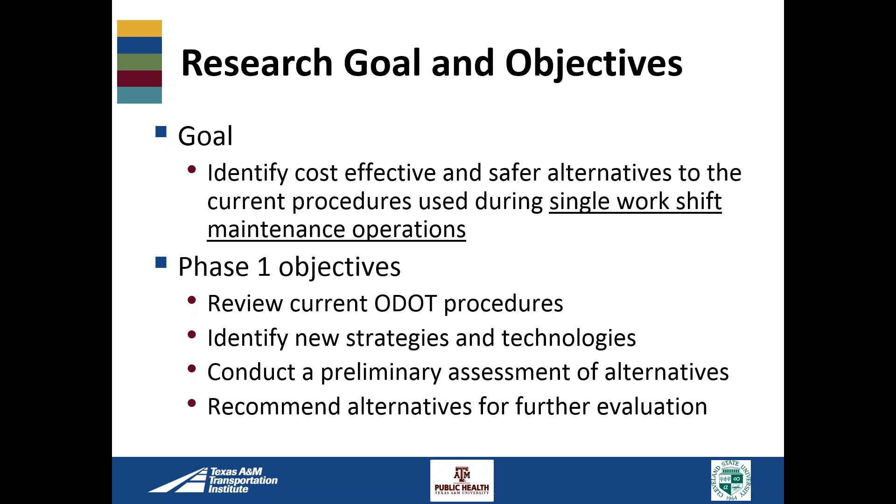It was broken into two phases. In phase one, we reviewed the current ODOT procedures, identified potential new strategies and technologies, conducted a preliminary assessment of these alternatives, and recommended some alternatives for further evaluation in phase two. In phase two, we actually purchased and evaluated those recommended alternatives, and also organized and conducted a demonstration of full matrix truck-mounted changeable message signs.

This was one of the alternatives we mentioned, and the maintenance crews in Franklin County were interested in looking at those devices, but not in us testing them directly. So we hosted a demonstration that brought together a bunch of vendors so that different ODOT employees and staff could look at those technologies and talk to the vendors directly, kind of a show-and-tell environment. I won't say much more about that today, but wanted to let you know that's something we conducted, documented a bit in the final report. At the end of the project, we recommended some of those alternatives for implementation, and we'll get to that at the end of the presentation today.

I want to quickly go over phase one to give you some background information. I won't go into as many particulars as are in the research report because we want to get to the phase two findings, but I at least want to give you some background so you know where we were coming from. In phase one, we basically followed and reviewed 15 different maintenance activities.

These were mainly in the Franklin County, Columbus area, involving mobile and stationary operations, some day, some nighttime. The majority were on high-speed freeways, again in the Columbus area, and the majority were single-lane closures, though we did have some two-lane closures. When I say high speed, I'm referencing roadways that were 55, 60, or 65 miles an hour.

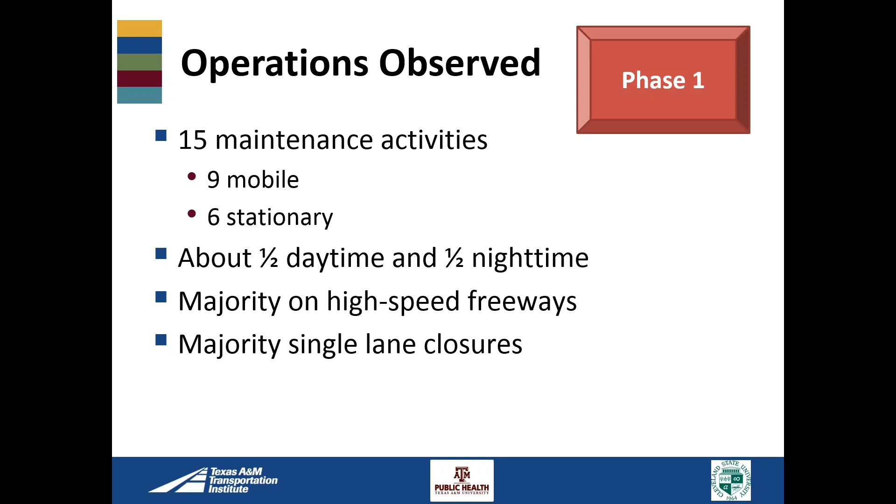Based on these observations, we identified different procedural and equipment safety enhancements that we thought might be applied by the Ohio Department of Transportation. I want to first walk you through some of the procedural safety enhancements. These don't necessarily call for adding any kind of equipment, but they just need to be recognized and applied in the field, most likely in new employee training or periodic refresher training.

The first safety improvement is just to pull over periodically to allow traffic to pass. This can be when a convoy is going to a work site or once they're at a work site. We did see a couple of instances where queues built up and we had impatient drivers, and we want to be aware that as impatience grows, motorists take more risky behaviors, which can lead to safety issues with the motorists, and that can impact the safety of our work convoys as well.

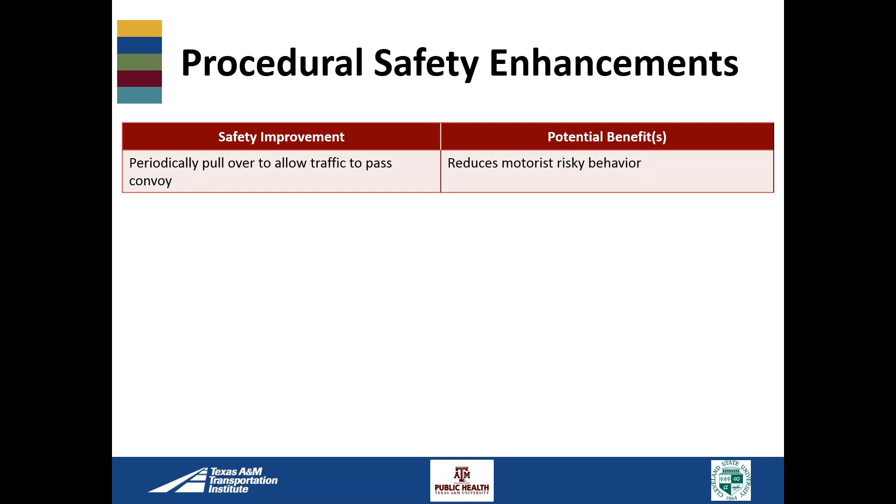If you have the ability, I know in some places there isn't always space to pull over, but if it is there and you notice a queue forming, we suggest that you periodically pull over and let that queue dissipate so that you reduce that impatience and the propensity to take higher risks to pass the convoy. We also noticed on a couple of different occasions that work vehicles were actually parked in merging tapers.

Merging tapers are where the motoring public transfers from a closed lane to an open lane, and you do not want any kind of equipment or work going on in that area. Equipment such as your shadow vehicle can sometimes be located in part of your buffer area, but really your work area, activity area needs to be downstream. So you need to be aware that if there's work to be done where the merging taper is, you need to back that up so that you have your merging taper out of your work area.

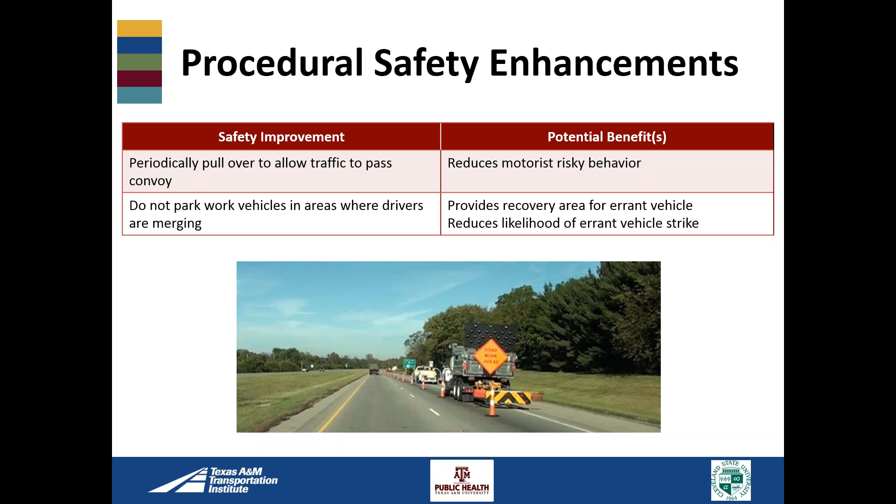This is just a picture showing one crew that was working there in a merging taper area.

In some instances with night work, some vehicles would be left at a certain spot and then they would progress down the road. I know sometimes there are questions about vehicle warning lights, about their intensity, the possibility of maybe them being a distraction in themselves. But we also don't want a large hazard left in a dark area inside the work zone that a motorist can't see. So if you're going to leave something, at least leave a light on, leave something that shows there's a piece of equipment there.

Because if they did have an emergency or something that would require them to pull over there, you don't want them hitting a piece of machinery or a truck that doesn't have anything illuminated on it to let them know that that's there. So just something to consider.

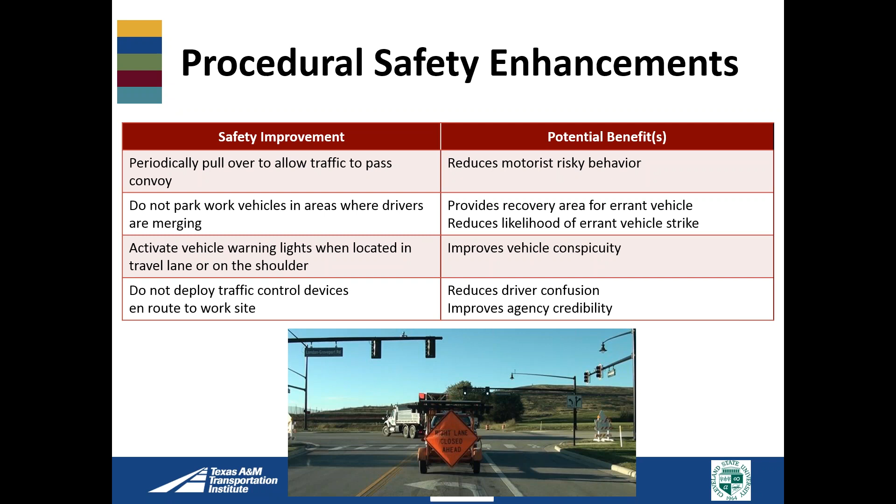Another thing we noticed in the field was that some of the crews were just making one pass to set up the dual advanced signing, so they would work on one side of the road and actually travel across the lanes on foot to set up the sign on the other side of the road, especially at night. We thought this was a negative impact on safety from the worker standpoint because of the low visibility of the worker. We'll talk a little later about how, when we initially watched in phase 1, the majority of the workers were wearing only class 2 high visibility apparel, which just highlights the upper body.

It's also important to point out the worker's position across from the work truck. That work truck did have lights, as it should, but if a motoring driver is looking at the work truck and trying to stay away from it, we want to make sure they recognize the worker as well. So we feel it would be best if you made one pass on one side so that your workers are near that truck, and then you circle back around. I know that adds a little bit of time, but we feel it improves the safety of the workers.

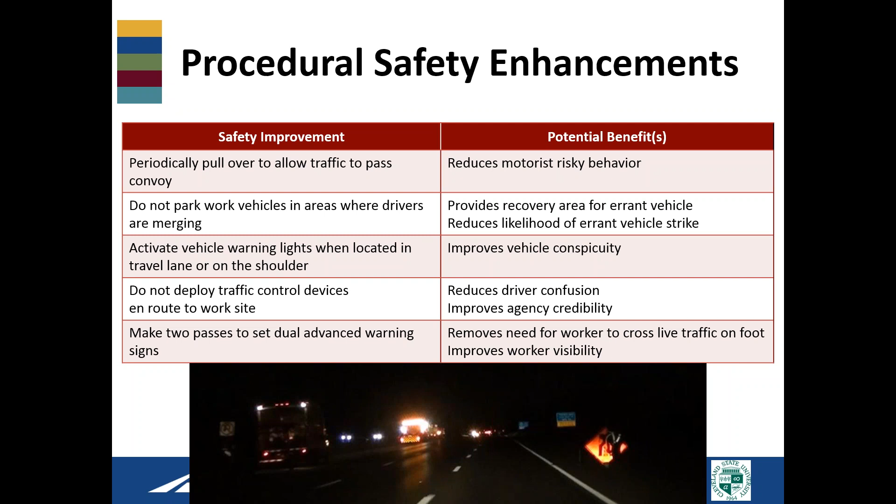In a couple of instances, we noted that the shadow vehicles used with mobile operations were either too close to the workspace, not allowing enough roll-ahead distance, or too far back, allowing too much room for vehicles to cut back into the convoy. We realize this is a hard thing to do - you want to pull back for sight distance, but you also want to protect your workers. So in training, you need to go back over these trade-offs with positioning your shadow vehicle so your drivers are aware of the need for buffer space, without making that area too large because of the potential for motorist cut-in.

Along the same lines, we need to make sure that the messages and positioning of an advanced warning vehicle - one that may be on a shoulder giving advanced notification of a mobile convoy down the road, or advanced notification of a lane closure - are positioned correctly and safely, and that their message conveys the correct text or symbols to warn of that upcoming hazard.

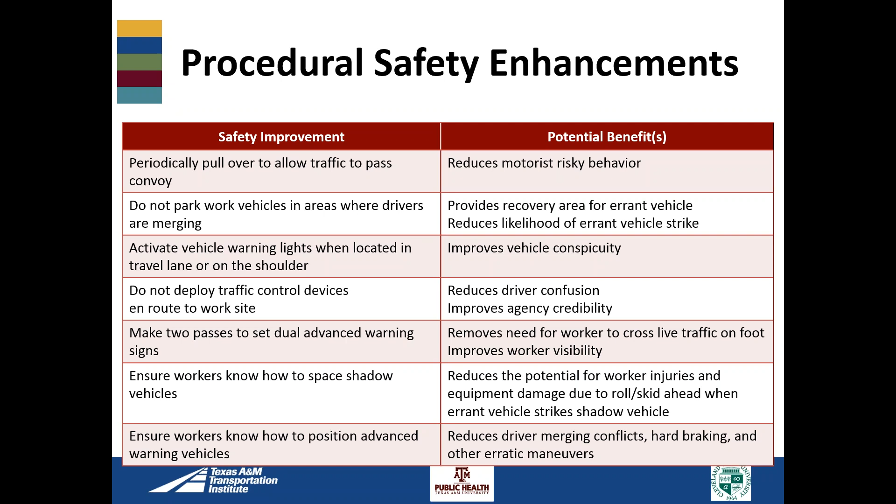Last but not least, something to think about with your maintenance crews: it doesn't have to be a formal development of internal traffic control plans, but there are several documents out there - one recently through the Work Zone Safety Grant Program that describes internal traffic control plans. It helps you in your safety meetings before you go out to discuss how many vehicles will be there, what equipment will be there, how you'll get in and out of the temporary traffic control, and where you'll stage equipment or materials, so you're aware of where your workers might be standing or doing the work. Thinking through that before going into the field can have a positive impact on worker safety.

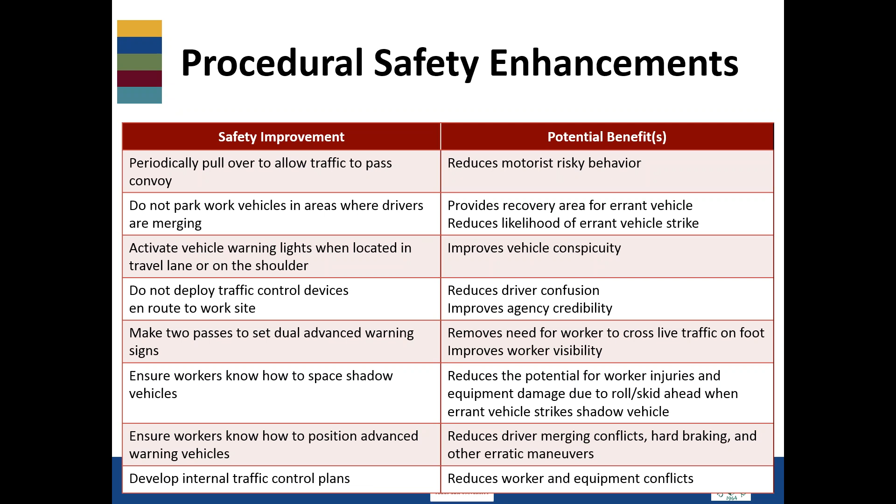Now I want to talk a little bit about some potential equipment safety enhancements that we identified that might be helpful, based on our observations from phase 1.

I want to start with observations on setting up and removing temporary traffic control devices. In phase 1, we saw several workers, as you can see in these pictures, deploying and retrieving cones and drums from platforms several feet above the road surface, with workers on the platforms, as well as those in the back of the trucks, unrestrained. Researchers were concerned these workers might fall off the truck or platform into active traffic lanes, or be exposed to other ergonomic risk factors.

associated with upper extremity musculoskeletal disorders. Researchers wanted to investigate methods that would remove the need for workers to be on foot as well. In some of these pictures you don't see workers on foot, but a lot of times in phase 1 we would see a third worker outside the truck actually straightening or positioning the barrels or cones, and we were hoping to get the workers off foot as well.

So a couple of things we wanted ODOT to consider: modifications to their existing equipment that may improve or remove the fall hazard and help with removing workers on foot. Also, there were some specially designed vehicles that could be used for maintenance of traffic, or for setting up and removing temporary traffic control devices, that would be dedicated and hold all the devices.

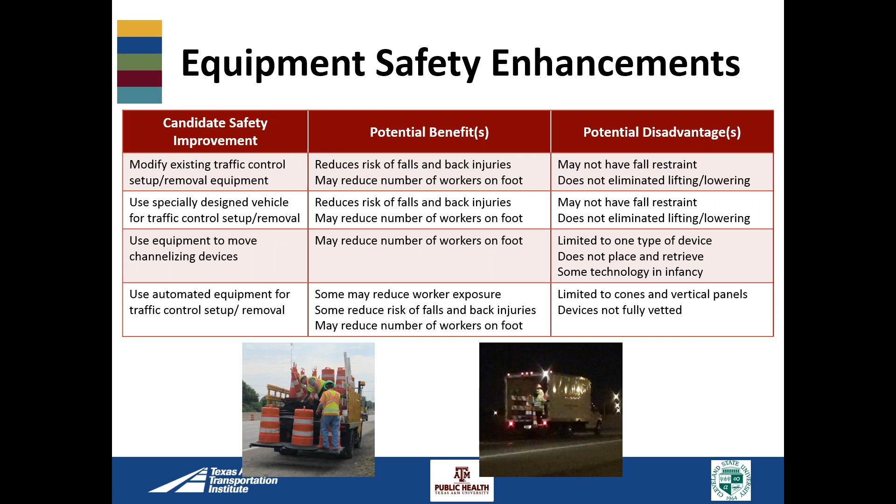We also noted at night that the maintenance areas were in general well lit, but that maintenance workers on foot and on equipment frequently moved into and out of the area illuminated by the portable work lighting. This is a picture from one of the night operations. You can see the area is fairly well lit. The truck pulled the light tower ahead so that it kept up with the work area. The light tower was aimed really well to avoid oncoming glare issues for a motorist in the adjacent oncoming travel lanes. But off to the right, you can kind of make out in the shadows the roller.

The roller actually lagged behind and would come in and out of the lit area and really potentially had a hard time seeing where they were working. This repeated change in lighting can negatively affect the worker's visual capabilities, and can lead to them working in shadows or outside the illuminated area.

So to eliminate the shadows, there's a possibility of adding equipment-mounted task lighting to these pieces of equipment, and we could also potentially use personal task lighting, such as lighting that affixes to a hard hat, which would allow the workers to have a pointed light source around them that we could focus on the task area.

Under dark conditions, the retroreflective material on the high visibility safety apparel is the only component that provides motorists with a visual cue that the workers are present. In phase one, researchers observed that the majority of the maintenance workers in Franklin County only wore performance class 2 high visibility safety apparel at night.

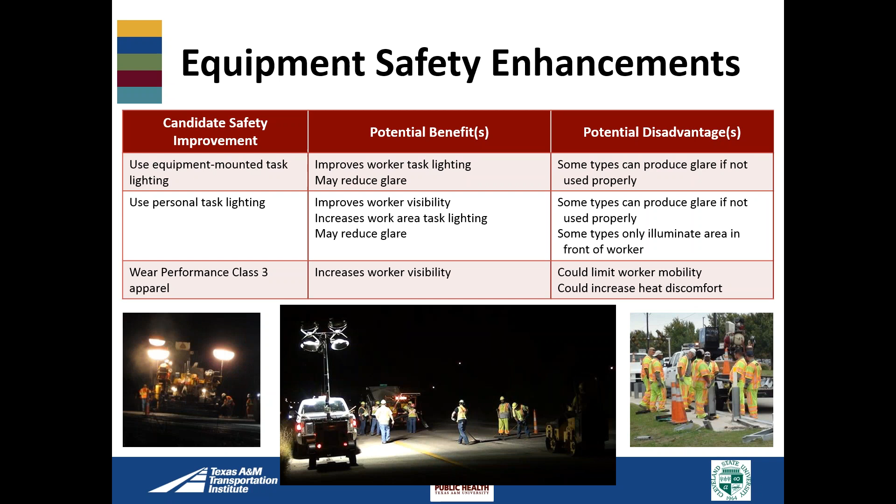A couple of other equipment safety enhancements we identified weren't necessarily associated with something we witnessed in phase 1 as part of the reviews, but we were thinking about the protection of the workers, so we wanted to make ODOT aware of 2 different ways of providing positive protection: one is the use of a mobile barrier, the other would be the use of portable steel barriers.

There's also several states that have successfully been using temporary rumble strips to warn of lane closures. These can be used not only on 2-lane roads, but several states, Texas being one, have successfully used them on freeways. Again, I mentioned earlier the use of full matrix truck-mounted changeable message signs - full matrix signs allow you not only to provide text, but also symbols.

They can also be used as the arrow board, so you don't have to have a separate arrow and a CMS anymore, one or the other. This actually can combine, and so for your advanced warning vehicle specifically, you can tailor more specific messages.

Rather than having a 3-line, 8-character PCMS that you have to tow on a trailer, it gives you a lot more versatility in what you would use. Now, you do have to watch out what you're posting. There are rules to follow with respect to the messages and how many you need to be using on high-speed roadways, and you need to make sure you're following those. But it does allow you a lot more flexibility in what you want to tell the motorist. And again, it's mounted on your truck and can be used as an arrow panel.

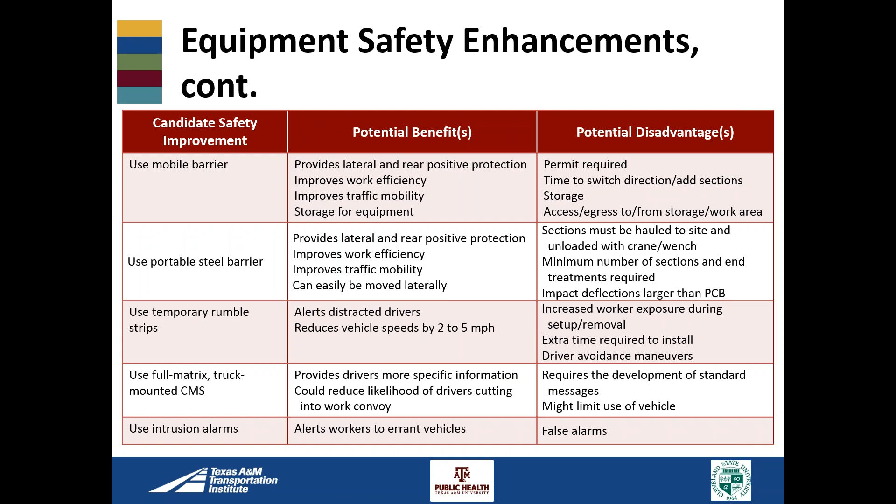Based on all that information, we provided an interim report to the Ohio Department of Transportation, and we met with the folks helping with the panel for this project. They decided they wanted us to study the equipment listed here. The procedural aspects I just discussed could be implemented through training, for new employees as well as refresher courses. I gave you a laundry list of different types of equipment, and in the final report that's all explained if you have interest in one we potentially didn't evaluate. But these are the ones we went forward with in phase 2.

We looked at modifying existing temporary traffic control setup and removal equipment. One way was adding a worker basket instead of just the open liftgate platform. We also looked at two different dedicated maintenance-of-traffic trucks, one built by the Columbus area folks, and one purchased from a commercially available vendor being used in Cleveland. We also looked at performance class 3 apparel, personal task lighting, equipment mounted task lighting, and the mobile barrier. Going through these pieces of equipment is what I'm going to spend the rest of our time on this morning, giving you details about those evaluations.

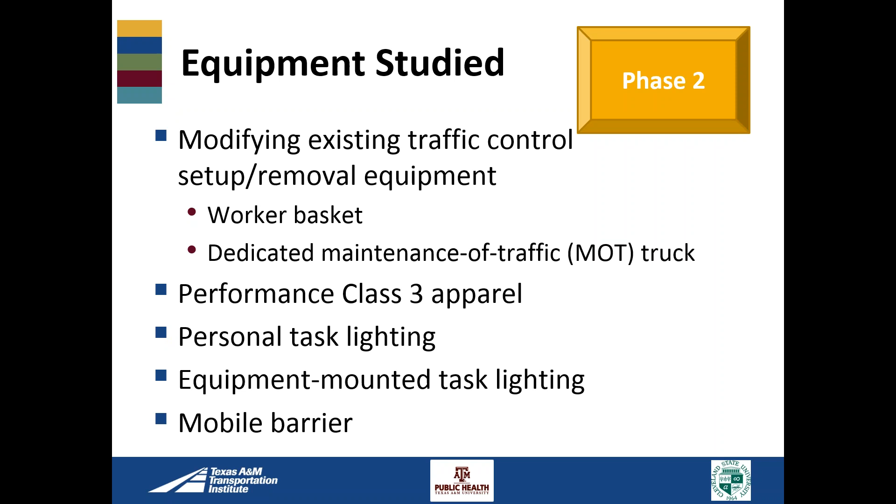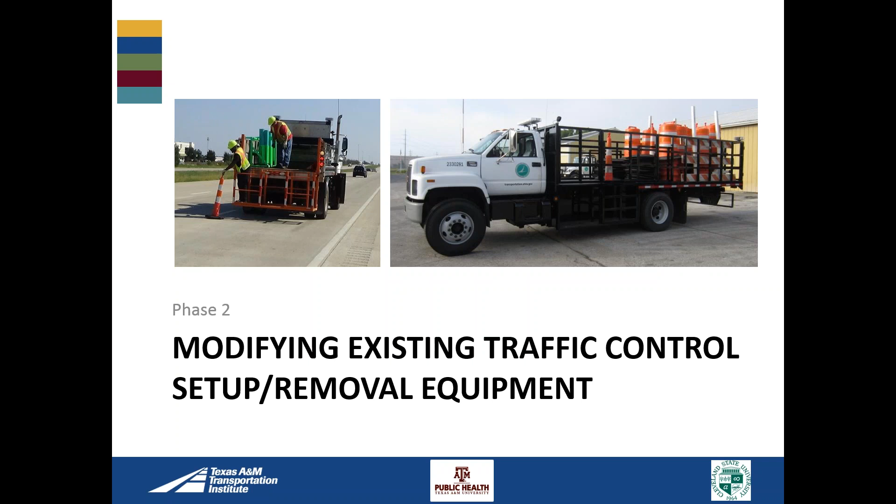Let's start with some of the things we looked at that would change the way temporary traffic control devices, mainly short cones, tall cones, and drums, would be set up and removed for your maintenance work areas. The research team used a field study and an ergonomic analysis to compare the existing and proposed methods of placing and retrieving temporary traffic control. I'm going to walk you through both those studies.

First, I wanted to discuss the existing equipment in more detail. One type was basically a pickup truck with a liftgate. Typically one worker was in the back of the truck while another was on the liftgate, and they would deploy. Mostly these were daytime operations, so it would be short and tall cones.

We also have what we call the rack truck, used in the Franklin County area, a lot used at night as well, even though this is a daytime picture showing some activities with it. It could hold some tall cones and barrels, but not quite enough for multiple lane closures. It similarly has a liftgate.

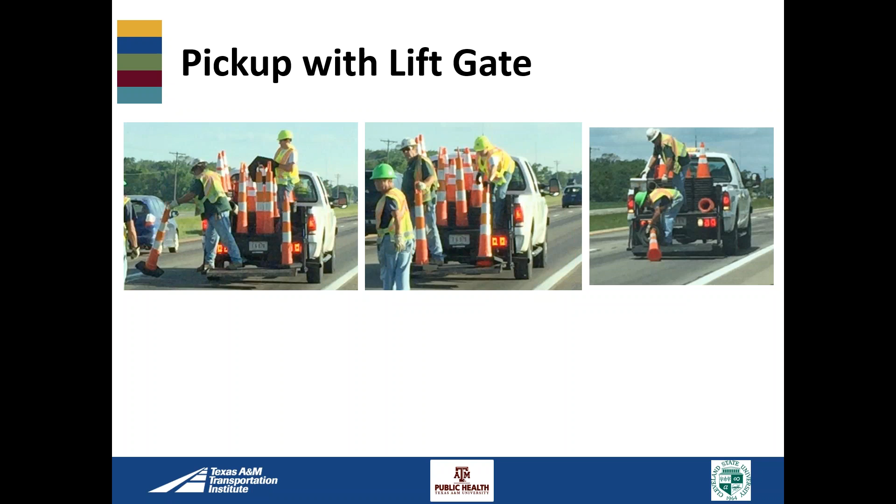The short cones were similar, and you might think short cones weigh less so they shouldn't be as much of a problem. The issue is that even though they're lighter weight, they are shorter, and since they're shorter they stacked them more, and they also have to lean over more to pick them up and set them out. Whereas with the tall cones, the gentleman setting it out, while it might be heavier, it's at his same waist height level, versus the short cone where he really has to lean over because of its height.

So separating the short cones, because they were stacked higher, and placing the short cones, did result in some high to moderate risk for musculoskeletal disorders. The main factors were the position of the arm, the repetition of lifting in conjunction with the body and arm postures, and the bending over. So we see some issues with both types of cones from this kind of lift gate assembly.

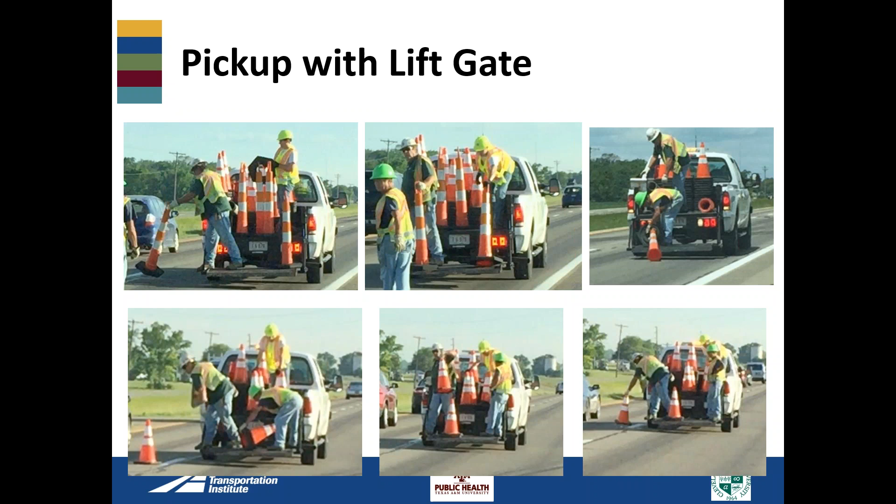The rack truck also had a lift gate.

There were some similarities, but we mainly looked at the cones and drums from the rack truck, the tall cones. This was a 3-person crew as well.

The tall cones in this instance were stacked as one-piece units, so we didn't have the need to lift the base over the head and put it on the cone. The bases weren't separated because there was limited space in the back of the truck, so they just stacked the cones.

But this did require the worker to separate the tall cones and move them into place for the second worker to place on the roadway. So although we didn't have to lift the base, depending on how tall the stack of those cones were, they were still lifting the whole assembly potentially over their head.

Sometimes the need to separate stuck cones or barrels constituted what they call a repeated shock. The shock was significant due to the need to pick up the entire stack of cones and work as a team to separate them. While this task didn't occur all the time, it was observed to occur about 40% of the time, and that can cause some issues with the risk.

During the pickup, that's a picture of them lifting over their head. I know it's a little hard to see at night, but you can kind of see that cone over their head.

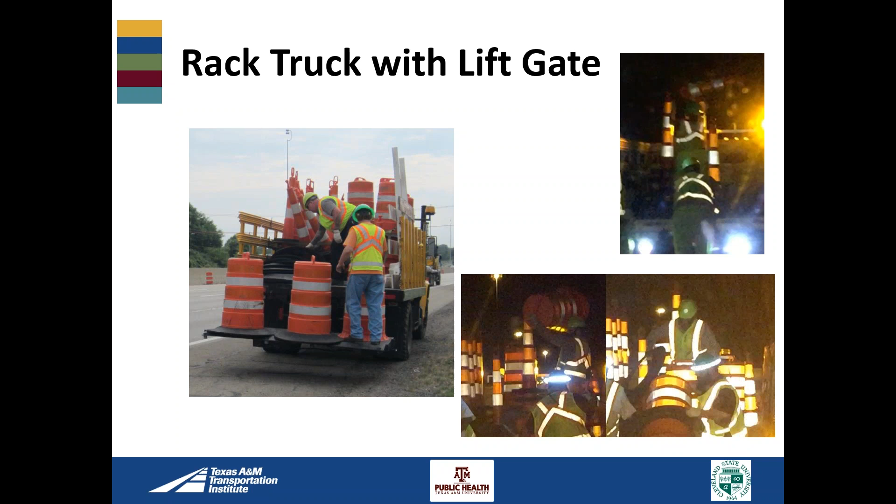So these are things we see between the two liftgate types of trucks, and it has to do with the assembling or disassembling of the temporary traffic control devices and the transfer of those from the upper platform to the lower platform. I wanted to mention that, while not in these pictures, most of the time there was at least one worker on the ground on foot who would help position those barrels and cones into place.

One worker disassembled the stacked drums on the bed of the trailer platform and put the bases on. Another worker lifted the assembled drums over the side of the trailer and dropped the drum onto the road surface. A third worker was needed to place the drums after they were dropped on the surface.

Researchers observed multiple occasions for the need for the worker to exert considerable force while pulling the stacked drums apart. During pickup, separating the bases from the drums also resulted in high-risk tasks due to the mass of the base, the repetition of the movement, and the arm-torso position.

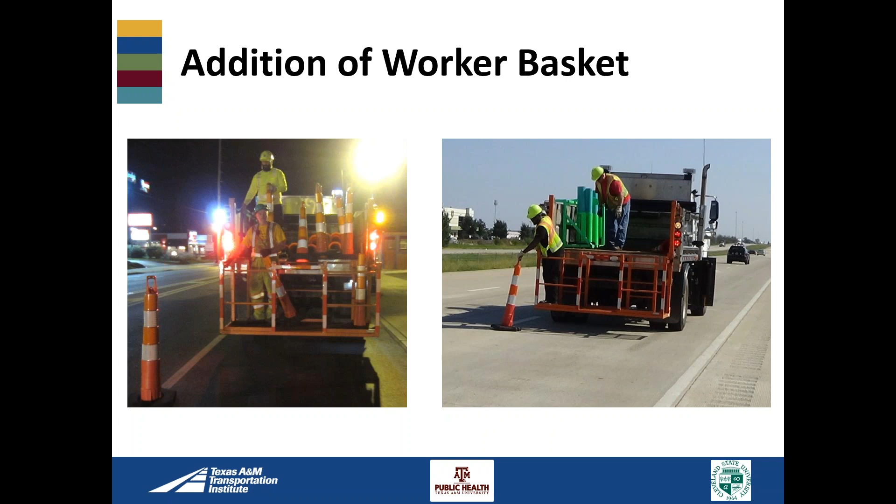Workers use two methods for deploying the tall cones from this basket: an over-the-rail placement, as you can see in this first picture, and an under-the-rail placement. The ergonomic analysis revealed that the under-rail drop technique presented low or minimum risk for upper extremities and the whole body, versus the over-the-rail method, which provided a higher risk for the operators. So we did not recommend that that be used.

This was a learning activity because these groups had not used the basket before, so we allowed them to try different things, which let us assess those different ways of deploying devices from the baskets. Some of the same issues with unstacking, stacking, and transferring devices between the upper and lower platform still exist with this device. It was suggested and tested to help provide fall protection for the worker on the lower platform, but fall protection is still lacking for the worker in the bed of the truck.

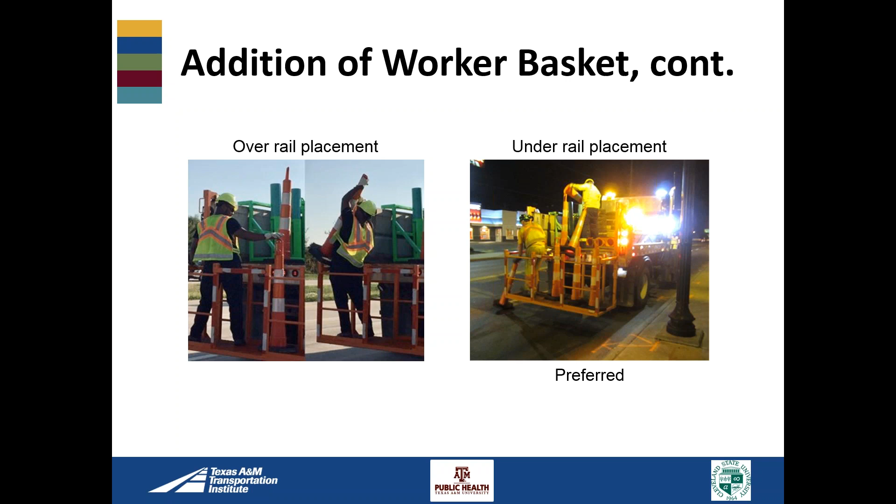This is during pickup. The worker's task consisted of an initial coupling, a swing over the basket rail, and a lift into the truck. It wasn't as easy to pick it up under the rail, so we didn't notice that as much. This unfortunately did lead to higher risk due to the worker having to constantly lift overhead, and there's the potential for the worker to raise the top rail.

As you can see if my clicker shows up on your screen, there's a rail right here that you can actually raise, and it's the same way on the other side where the worker is standing. However, if you raise that, you lose your fall protection. So unfortunately, you have to choose one or the other. Again, we're just pointing out the different ergonomic issues associated with lifting and transferring, but there's a balance between providing that and providing fall protection as well. You need to be aware of both going forward.

Again, while we did see some ergonomic issues with the unstacking, the stacking, and the mass of the devices in this project, that really was a little bit outside the scope for us to apply solutions to. But we wanted to make them apparent and document those, so moving forward there may be additional considerations for those.

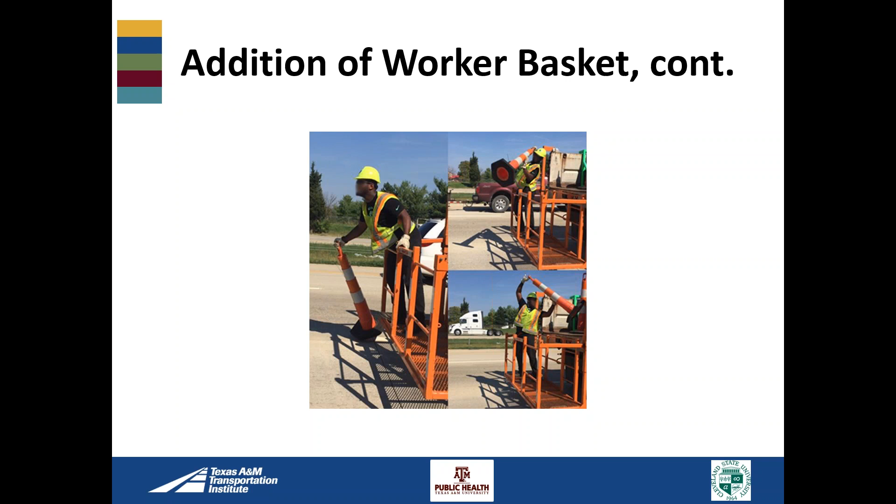So one of the first things we did is an assessment of the ergonomics in the yard, looking at different design ways you could remove or add railing. We measured the characteristics of the truck, investigated the design, and identified potential uses. We did an analysis for both an assembled drum and an assembled cone, setting it up in what we thought would be the primary use configuration.

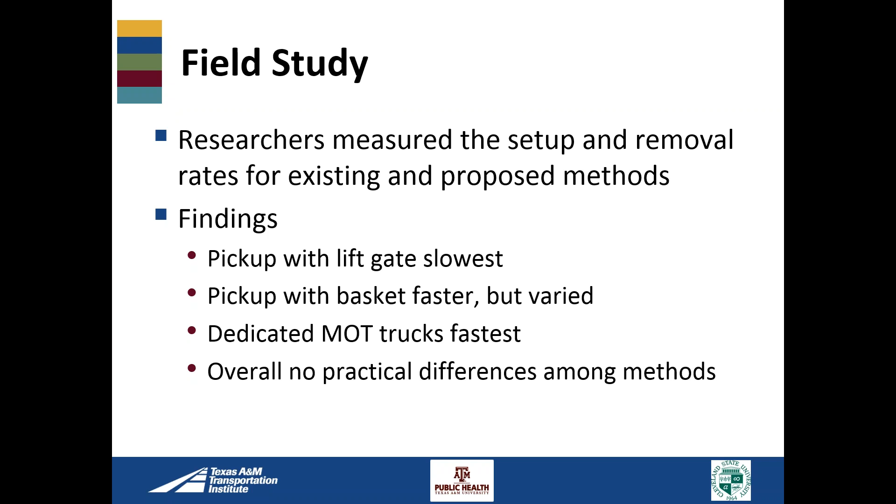Now we're going to switch gears and talk a little bit about the worker apparel.

In phase 2, researchers compared two worker apparel options to the current standard and conducted a photometric evaluation to visually compare the worker apparel options with and without personal lighting.

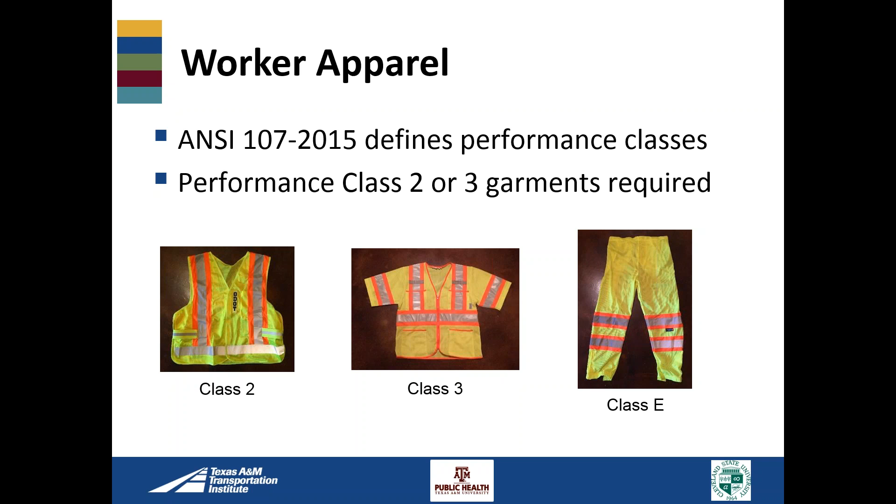We also wanted to look at personal lighting. The Ohio Department of Transportation decided to purchase some halo lights for the night crew in Franklin County. These lights attach to your hard hat and provide 360 degrees of light around a worker.

There are four different light modes, basically the intensity of the light. We just looked at two in our study, the brightest and the dimmest. The versions we purchased, a while back, were corded with rechargeable battery packs. Halo now makes a cordless light that runs on one battery, so I want to bring that to your attention in case you look into these now.

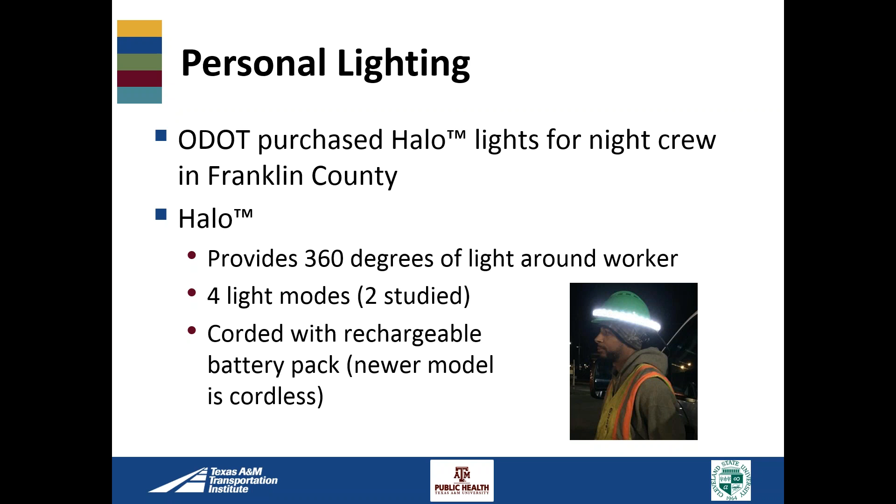For the photometric evaluation, what we did was look at several different treatments. We looked at the Class 2 vest on a mannequin, as you can see here, and we looked at a Class 3 ensemble. This again included the Class 2 vest and the Class E pants.

The guys at night, and ladies, in Franklin County weren't as interested in wearing the vest with sleeves because of their concerns for it limiting mobility and potential for it to be hotter, and so they were more interested in just trying out the pants.

We also looked at the halo in the brightest, dimmest, and we had situations where we didn't use it or it was off. Basically, we looked at the luminance, and luminance is a measure of light reflected from a surface or emitted by a light source, roughly equated to its brightness.

Researchers measured the luminance of each ensemble and halo configuration under 2 lighting conditions, light and dark, and 3 different positions. You can see that here in the graphic. In one position, the mannequin was right near a balloon light, which is the square in this graphic. Sometimes the mannequin was in front of the light, between the vehicle and the light, and sometimes the mannequin was behind or past the light.

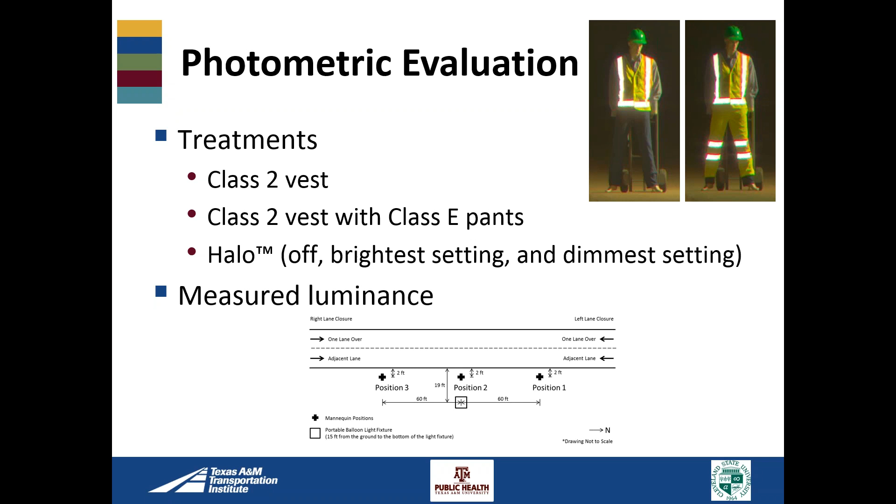We also looked at 2 lane closure configurations, a right and left lane closure, and we positioned the vehicle in the lane immediately adjacent to the work area and then 1 lane over. The vehicle itself was parked 300 feet upstream of position 2. This length represents the distance a vehicle going 70 miles an hour travels for the time it takes a driver to recognize the existence of an object in the roadway ahead until the driver actually applies the brakes or takes some kind of evasive action.

Findings from this study: what we did is we actually looked at the silhouette luminance. So we wanted to say, what does a person see? Instead of focusing on just the individual strips, we wanted to take it as a whole body of a person, like we'd like the worker to show up. So to do that, we used this area shown in the picture on the right, and then we wanted to compare the silhouette luminance from the Class 2 to the Class 3 garments.

So what you're seeing in this table is the percent change from just having a vest to the ensemble shown in this picture, and this was without the halo. I'll get to the halo data in just a second. What you can see is since these are all positive numbers, it means we had an increase in the luminance, which makes sense because we're adding more retroreflective material. Overall, the increase in luminance ranged from 17 to 275%. And again, you can see how it delineates more of the body of the mannequin, not just the upper portion, but the legs as well.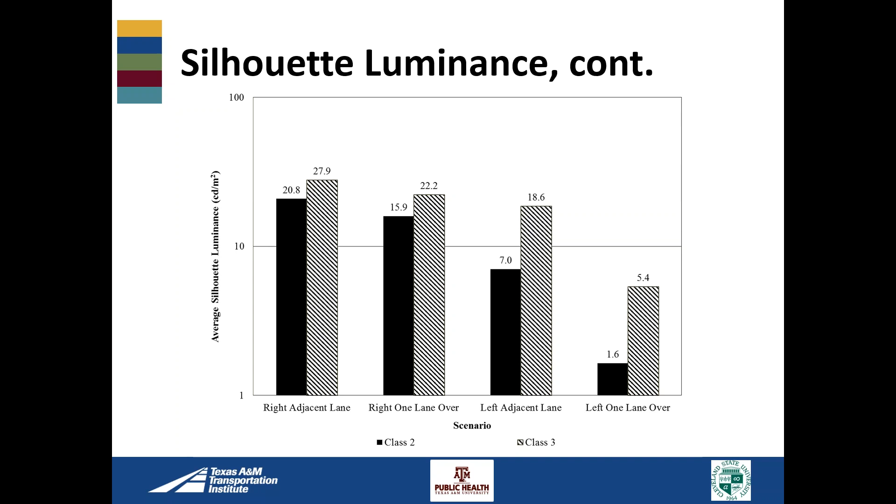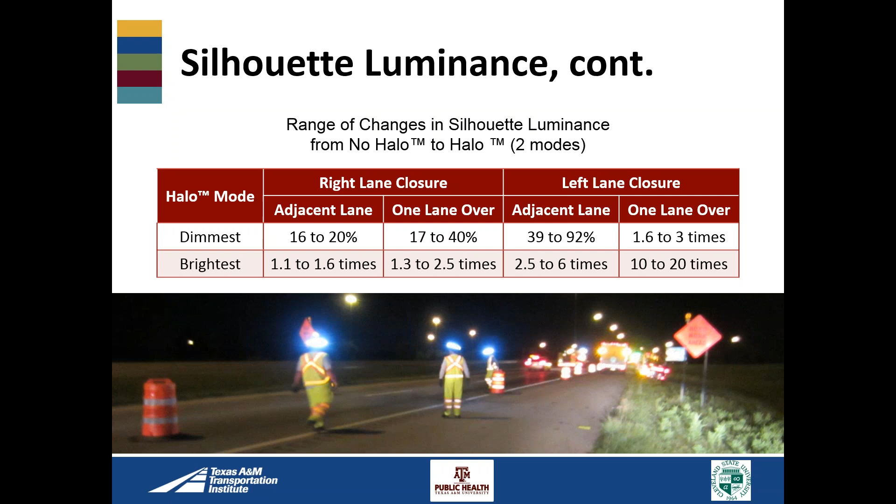There's a picture at the bottom. I know it's a little blurry because it's a nighttime photo and folks were moving, but you can see them in their Class 3 ensembles, and you can see them with their halo lights on, and you can definitely tell that they're there. It also provides them with the task lighting they need to perform any work. I'll show you a couple more pictures in just a second about that as well.

So we want to talk a little bit about visual angle. We want to make sure that folks can see the worker as they're approaching. So what we did is we actually backed up to 700 feet and wanted to see how the luminance would come out and what we would see.

As you can see here, we took the treatments, the Class 2, the Class 3, and then we also just looked at the drums. We placed a few drums out there. We wanted to see what their linear size was, and we converted that to a visual angle, and then we looked at the percent change.

A person with normal vision, so let's say 20/20 vision, has the ability to discern a detail of 1 arc minute, which is approximately 0.02 degrees. This means that at 700 foot, a person with normal vision would be able to distinguish an object approximately 2.4 inches tall. These findings show that the Class 3 ensemble increases the visual angle due to the addition of the retroreflective stripes on the pants. In addition, this table shows how the Class 2 vest and the drums have similar linear sizes and visual angles.

So let's take a minute and look at not just the data in the top table, but the pictures below. I again hope my arrow's coming up. If not, I'm going to try to also use my words to describe. Let's look at the black and white photo on the bottom left.

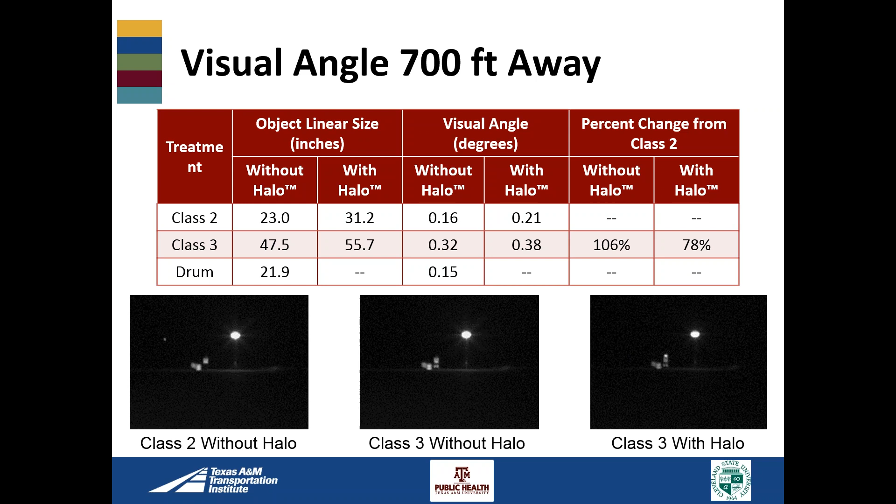When we add the pants, you can see you at least notice there's something here which extends the visual angle of this person and allows you to start to distinguish that that may be something different than just a line of drums. We also can see that when we add the halo, we get another visual cue above showing again a larger extension and start to be able to make out that that's possibly a person and not just a drum. So we think that this is, again, showing the benefits of the Class 3 ensemble and the halo lights because it allows approaching motorists to better decipher that there are workers amongst the temporary traffic control devices.

We also looked at adding equipment-mounted task lighting. In phase 2, we purchased 3 commercially available light-emitting diode balloon lighting systems. Each lighting system was powered through the equipment's internal power system and had approximately 23 foot of cable to reach the battery from the balloon light, and they affixed to telescoping poles.

Once the systems were installed, the workers could quickly and easily mount the pole and balloon light upon arrival at each job site. We observed this activity and found that 2 workers could set the balloon light in the field in a matter of 3 to 4 minutes. ODOT chose to install the balloon lights on 3 pieces of equipment in Franklin County: a pickup truck, you see here, the asphalt paver that they have, and the roller that I mentioned previously.

In phase 2, researchers measured the illuminance around the pieces of ODOT equipment listed above, with and without the balloon lighting installed. The addition of these lights increased the illumination of the work area to levels at or above the minimum levels recommended by ODOT. That is the minimum level of 54 lux. That's pretty standard for a lot of different states and has been recommended in a lot of different research to be able to see tasks around this type of equipment.

And the increased illumination improved the workers' ability to see the work area and the work tasks, and they thought that it positively impacted their quality of work because they could see better. The balloon lights were easy to set up, and they also reduced the likelihood of glare to oncoming motorists.

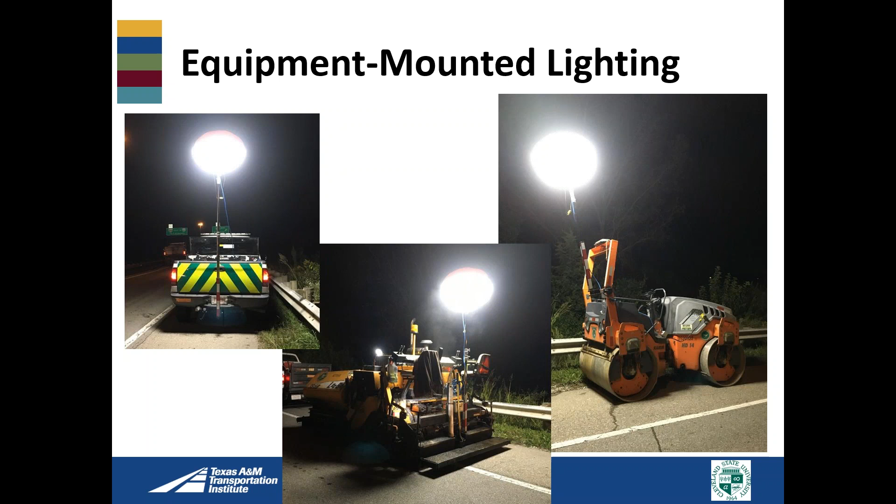So last but not least, I want to go over some of the things that we observed with the mobile barrier. Based on the phase 1 findings, ODOT decided to purchase a mobile barrier to protect workers conducting their maintenance operations in Franklin County. Researchers observed the use of the mobile barrier shortly after it was received and again 7 months later. Based on a literature review, discussions with other agencies that use the mobile barrier, and ODOT's experience, researchers identified some of the operations for which the mobile barrier has been used and its advantages and challenges.

So the mobile barrier is a commercially available product. It can be driven to the work site and moved around as needed. It can be used during the setup and removal of temporary traffic control as well as during the work activity. It can be configured to different lengths depending on the number of wall units that are used.

The picture here shows when they were assembling the barrier in a storage facility in Franklin County. This is what we call a wall section, shown in the upper right picture, and then it shows it installed. With one wall section, the overall barrier length is approximately 62 feet. With 2 wall sections, the overall barrier is approximately 82 feet.

The mobile barrier can be configured for right and left lane closures. The system includes storage that you can see here to carry tools, equipment, and materials. And there are optional items that include power, lighting, signing, a truck-mounted attenuator, and the rear steer.

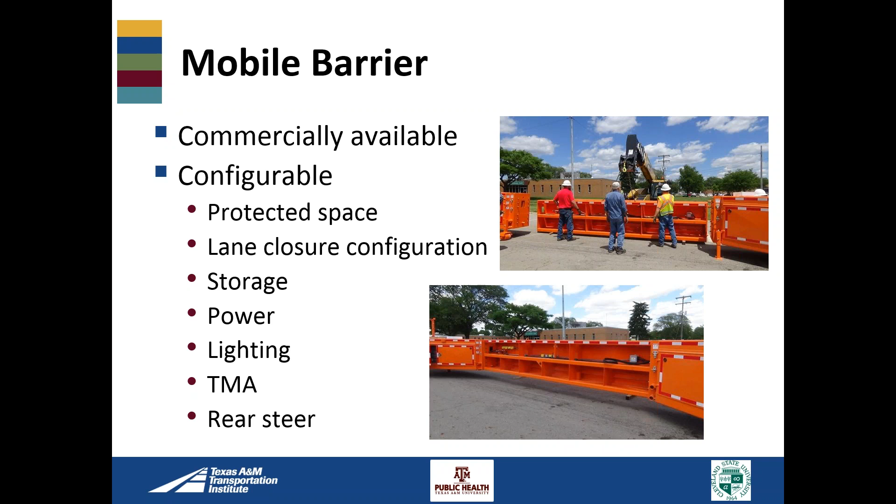Here's a few pictures of the mobile barrier in use. In October 2016, we observed several types of maintenance operations where the mobile barrier was used. This included barrier wall reflector replacement, seen in the upper left, graffiti removal, seen on the right, and guardrail mowing, seen on the lower left. In addition, ODOT used this barrier for median barrier wall drainage structure repair.

However, ODOT realized that certain repairs, such as partial depth concrete repairs, were not possible with the existing configuration because the rear caboose had fixed axles. So when trying to move from one repair location to another, the caboose wheels would have crossed over recently repaired sections. So in early 2017, ODOT purchased a rear steer caboose.

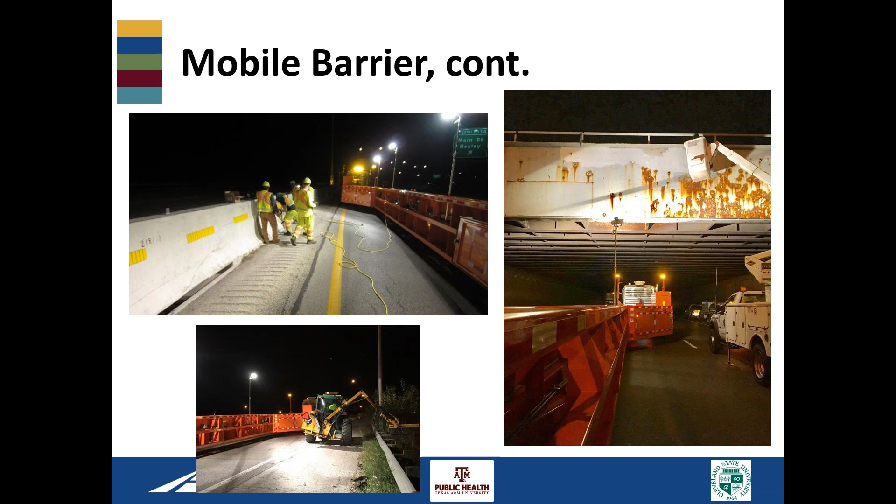The rear steer caboose allows the crew to turn the rear wheels of the mobile barrier, allowing the mobile barrier to be more easily moved around when traveling to and from the work zone and from moving from one repair to the next.

So this is a picture later on after they received the rear steer of being able to do that bridge deck repair. Now the rear wheels on that caboose can be moved around this patch and not drive through the fresh concrete.

You can also see from these pictures, I'll go back one, you can see how the tools are plugged in, there's storage here, the lighting up here in the different pictures, there's lighting down here for the arm mower. You see again the lighting here in the storage. There were some separate tools and trucks needed for this, but not always.

So again, we feel that overall, ODOT successfully used a mobile barrier with many different types of operations, and some of those are shown here. The addition of the rear steer caboose improved maneuverability, such that the mobile barrier could be more easily driven into and out of the storage area and around repairs.

Based on the literature review, discussions with other mobile barrier users, as well as ODOT's experience, we created this list of advantages and challenges, and I just quickly want to go through that. Some of the advantages are that it provides lateral positive protection, and has a whole bunch of onboard items that can be beneficial to the work operations.

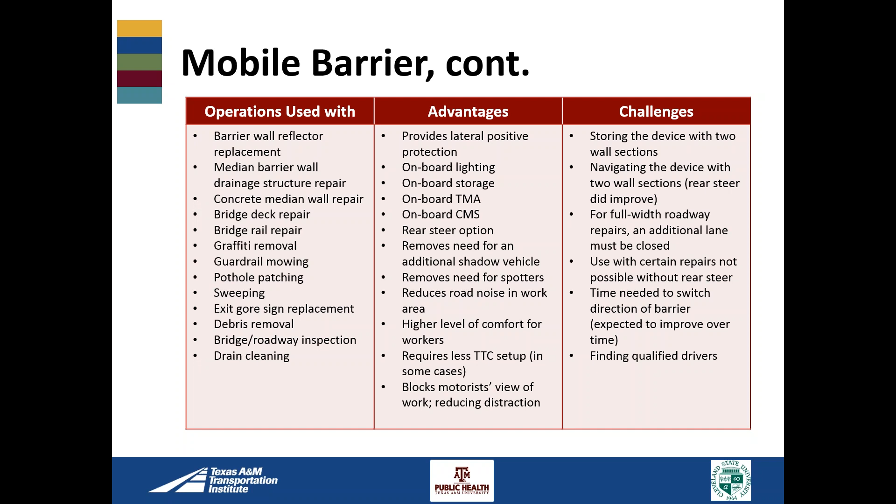So I want to go over the summary and recommendations, and then we'll open it up for questions.

Overall, researchers evaluated existing and alternative methods of temporary traffic control setup and removal through field study observations, an ergonomic analysis, and discussions with workers. While researchers identified some differences in the deployment and retrieval rates among the equipment used, the differences were not considered practically significant. Researchers believe the deployment and retrieval rates for the alternative methods were similar to those for the existing methods. The ergonomic assessment revealed several issues with the separation and assembly of tall cones and drums.

In addition, the repetition of the tasks, mass of the temporary traffic control devices, and transfer between high and low platforms contributed to high risk for musculoskeletal disorders, and again we saw this across several different types of vehicles used.

While the MOT trucks presented workers placing and retrieving devices from the lower platform with less risk than some of the existing methods, the potential for falls from the upper platform was increased because of the height difference between the road surface and the upper platform, and the need to bend over to below foot level to lift lower devices. Even though the MOT trucks have safety railing around the upper platform, a portion of that railing must be removed during deployment and retrieval.

Overall, every method evaluated exhibited significant safety risk for falling because of unsecured or unsupported workers on lifts, trailers, or in the beds of trucks. That's just something we need to consider going forward, is how to mitigate those.

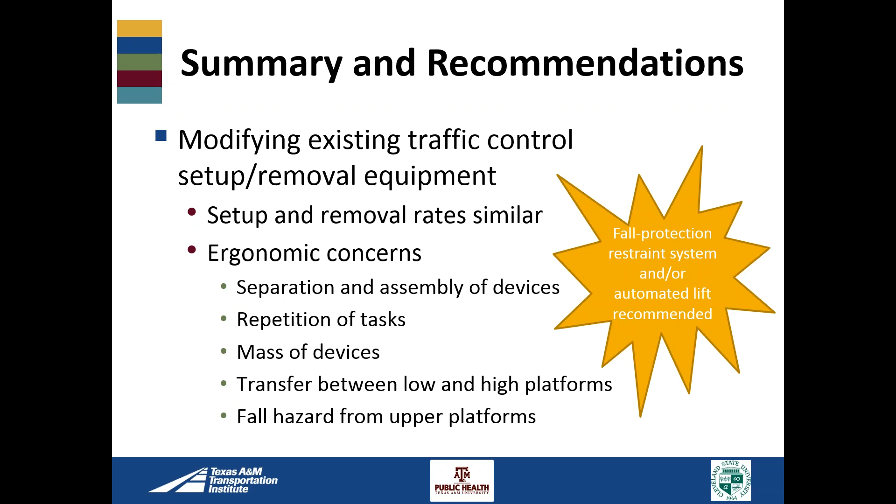For the worker apparel and lighting, we evaluated the effectiveness of changes to high visibility safety apparel, personal lighting, and work area lighting. The photometric evaluation showed the benefits of the Class 3 ensemble over the Class 2 vest. For all mannequin positions and lane closure configurations, the Class 3 ensemble increased the luminance of the worker. The increased visibility was most apparent when the mannequin was backlit - that's when the mannequin was in the position between the vehicle and the balloon light.

The Class 3 ensemble also increased the visual angle of the worker, which helps approaching motorists distinguish the workers from the line of drums. Overall, we recommend that Performance Class 3 high visibility safety apparel be worn at night, since it improves the visibility of workers and helps distinguish them from other temporary traffic control devices. The halo light also increased the luminance and visual angle of the worker, providing yet another visual cue that workers are present. The halo can be used as desired to further increase visibility and provide individual work task lighting.

What we did find is, as the balloon lights were implemented on some of the equipment, the need for the halo light for task lighting was reduced because they had lighting on the equipment. So there's kind of a trade-off there. That's why we wanted to leave the halo light to be used as desired, because it does help. But if you're using other illumination techniques, it might not be needed as much for the task lighting aspect, because you have the light from the balloon light on the equipment itself.

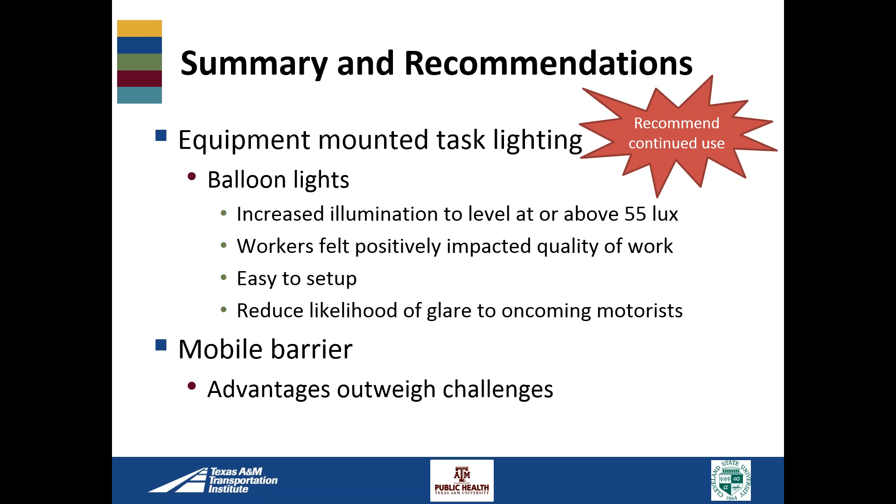ODOT also successfully used a mobile barrier with many different types of operations. Researchers feel that the advantages outweigh the challenges, and thus we recommend the continued use of the mobile barrier to improve worker safety as well.